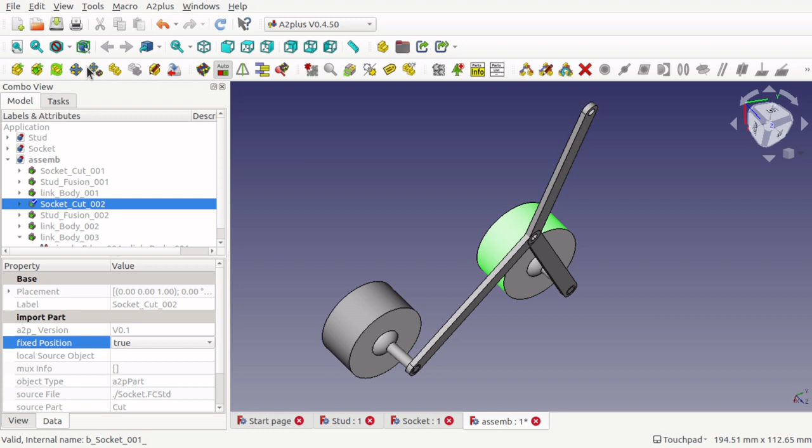If I come in here and drop this and select this one, which is fixed position of false at the moment, fix that one to true, and I can move this now, and you can see how that's moving as well. So you can see those ball joints working there.

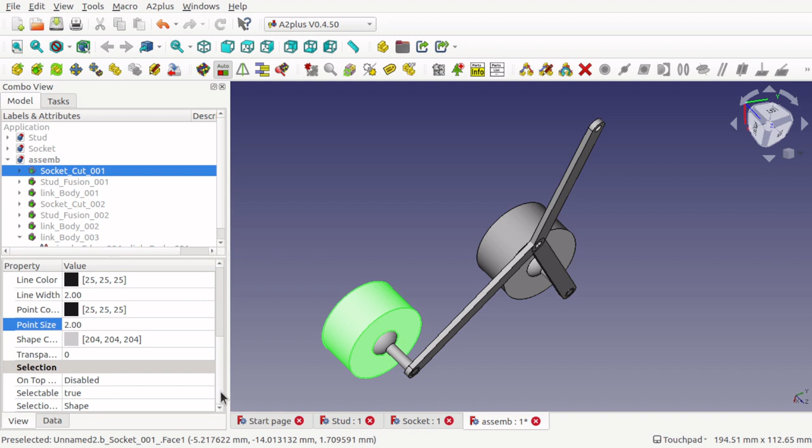As I said, this is very top level and there's not too much modeling that's gone into these. They're quite simplistic, and I can show you those if I click on that one and come into the view and come down to transparency. There we go, and just knock that transparency down. And you can see how that ball joint sits in that socket there.

So very simple. Again, as I said, we'll model these in a much more authentic way in another tutorial. But this is just to get you up and running with A2plus Workbench and how to create a ball joint assembly.

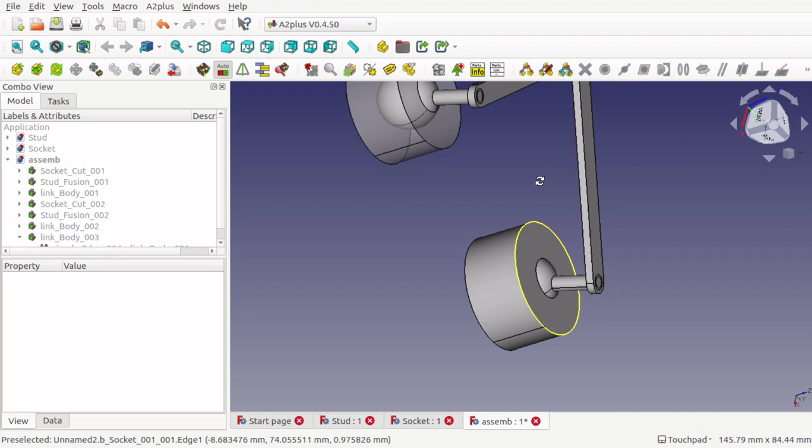So we're going to create a very simple ball joint for this demonstration, and this is just to get us up and running into the A2 workbench. And for this, if I bring up a ball joint, we've got the stud, the ball and the socket. Now I'm going to recreate this in very simple geometry.

So I'm going to create a cylinder here, a sphere here, and basically another cylinder for this to actually sit in. And this is just to get us up and running with the A2 workbench and how to get that simulated in there. We'll be going back to this and recreating this in much more detail, probably with the part design rather than the part workbench, and using a revolve to create this stud and modeling this properly within here.

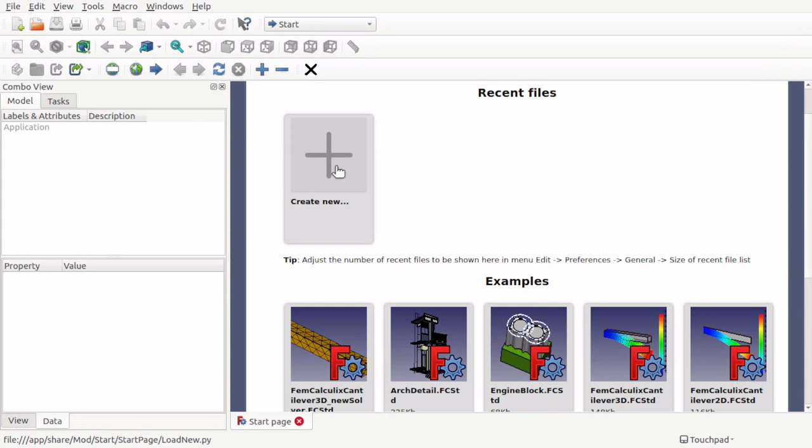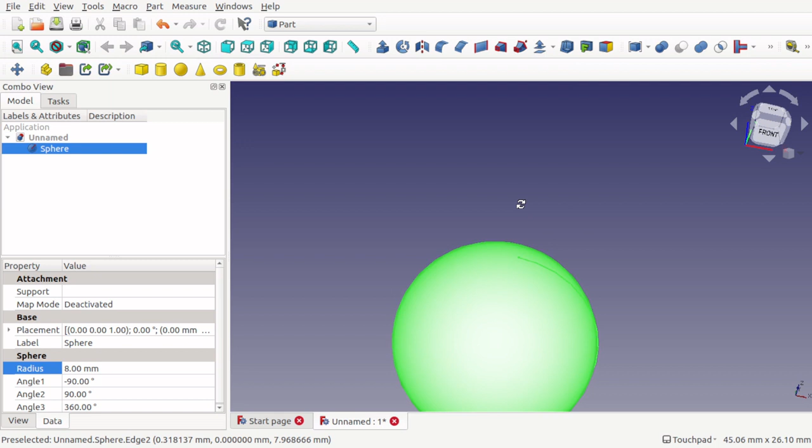So I'm going to go over to FreeCAD, create a new document. I'm going to jump into the part and we're going to create the stud first. So the stud is quite simple. We need a sphere and we'll give that some radius. There's 5mm at the moment, so we'll give it about 8. And also I want to place a cylinder on here. So I'm just going to place this in the front and move this into position, and I'm going to place a cylinder in there.

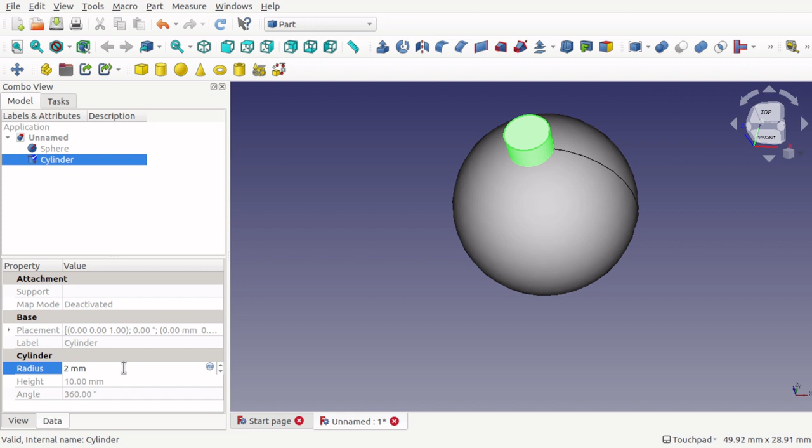So that's there, and we're going to give that some height. So this is the stud, and we're going to keep the 2mm radius and go for about 20 on the height. So there we go. So it's a very simple stud with a ball there, and we're going to use the sphere and hold down control and click on the cylinder. And we're going to combine those together with make a union of several shapes. So those are combined as a fusion there.

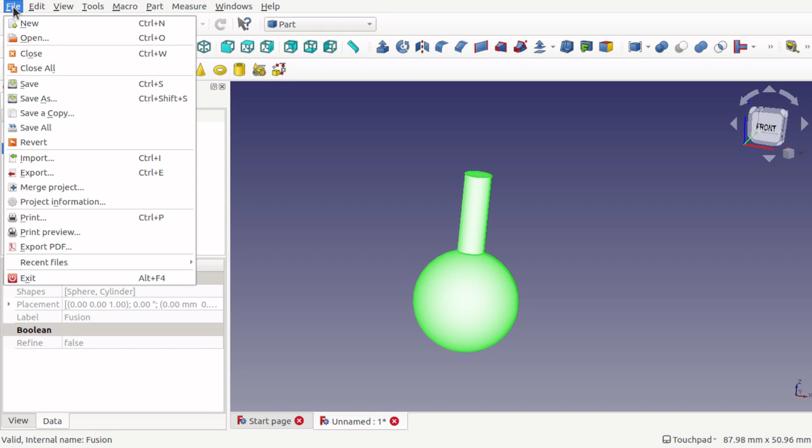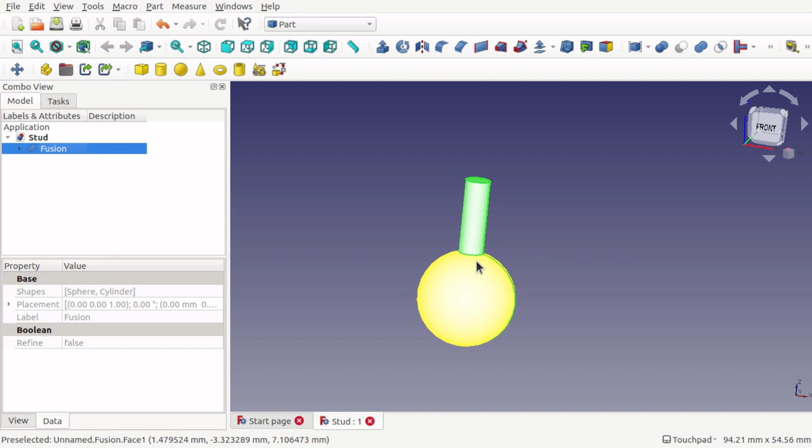Now with the A2 workbench, we import the models in there. So we need to save this off. So save as, and I'm going to create a new folder, and I'm going to call this ball joint. And in that folder, I'm going to save this as the stud. So that's that one done. So you can see what level of detail we're going to. We're going very top level here. So that's the fusion with the sphere and the cylinder for our stud.

And now I'm going to create a new document. And this is going to be for our socket. So I'm going to save this straight away. Save as, and I'll call this socket. And it's going to save in the same directory as the ball joint. And for that socket, we need a cylinder. Now if we remember back to our stud, we can actually come in here and look at our cylinder and sphere in here, which I need the radius from.

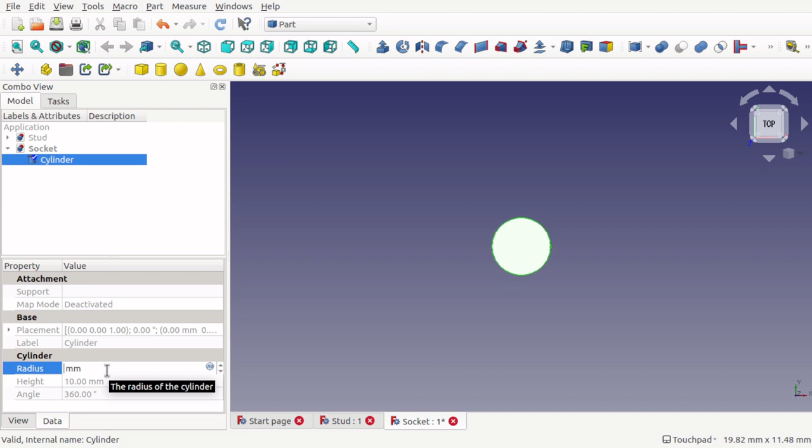So that's 8mm. So this is going to have a pocket in here that's going to contain a radius of 8mm or slightly more to house that ball in there. So we come back to our socket, and I'm going to make the radius of this around about 8 point... well, I need it more, so we can go for 15. And we need a height. I'll go for 15 on that one as well.

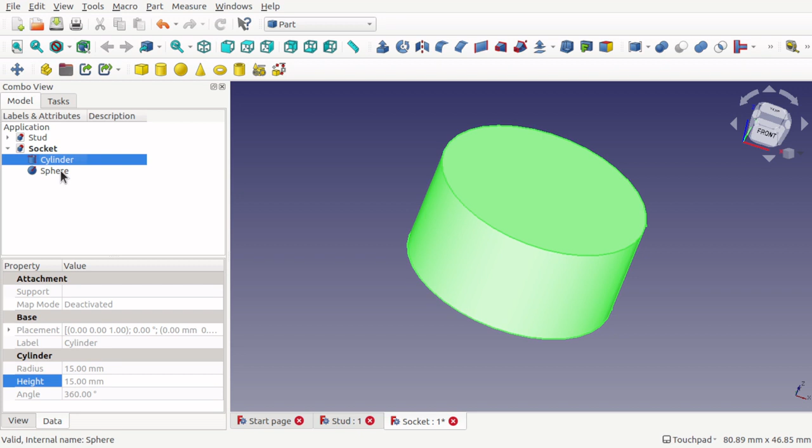So that's done. I'm going to create a sphere now. Now that sphere would have gone in the middle of that cylinder, which is fine. And that sphere is going to be the same size as the sphere here, so 8mm. And that will section out a piece inside here that will house that ball.

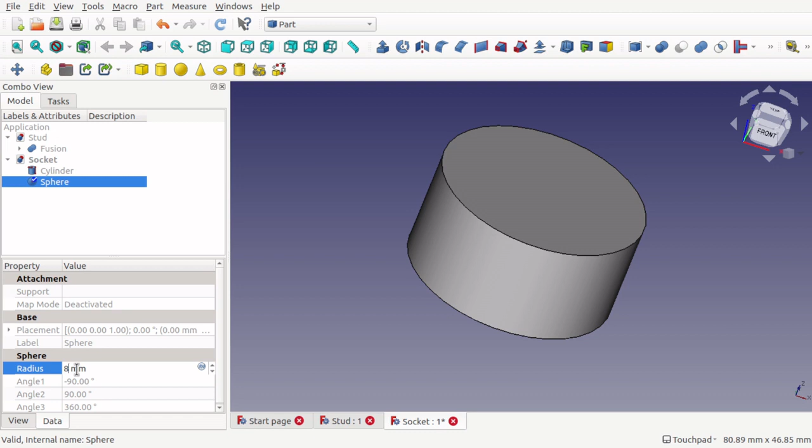So come in here, that sphere, 8mm on the sphere. Now I'm going to click on that cylinder. I want to see inside it so we can see what we're doing. Come down, look at transparency, and just set that to around about 50. You can see that sphere is inside there.

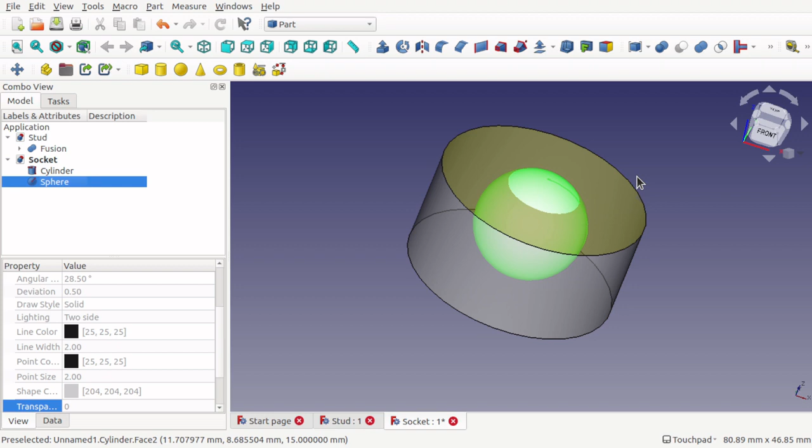Click on the sphere, right click, transform, and I'm going to bring this up so it just pops out the top. Something like that. So that's all we need. And I'm going to take the one that I want, which is the cylinder, and control click the sphere to highlight those two. So the one that I want is the cylinder at the moment, and I'm going to remove the sphere from inside that, and we're going to use the make a cut of two shapes.

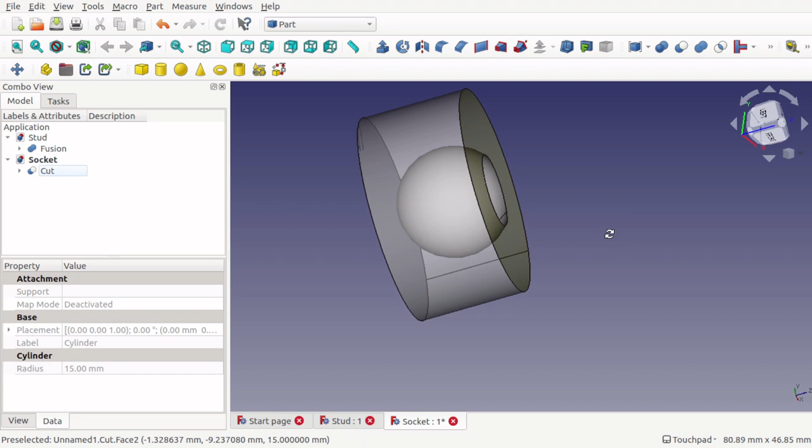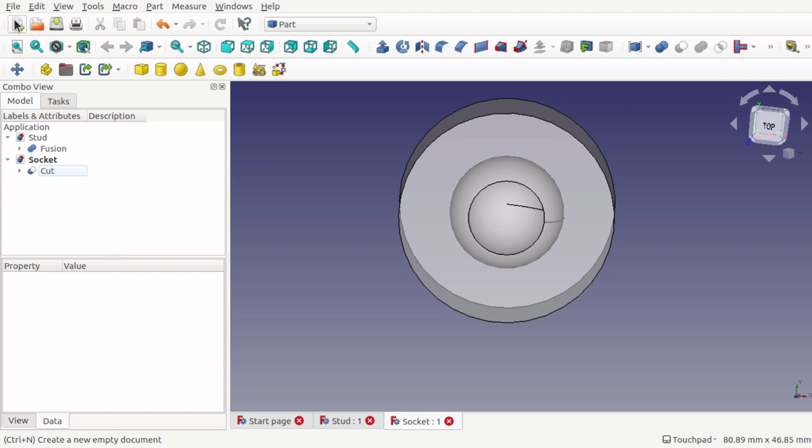And you can see that's been removed from inside there. We've got the cut there. So what we'll do now is place the ball in here when we come to our assembly and add restrictions within this to house that stud. So we can save this socket now, Control S or File Save, and now we're going to create an assembly. So for that we need a new document again, and jump up to the A2plus Workbench.

If you haven't got this installed, then you need to come over to the Tools Add-on Manager, and within there you'll find the A2plus Workbench. So there it is there. So just click on that and click Install. If it's a bit old, you can also update it if you so desire. And you may need a restart for that workbench to appear. Once you've got that workbench there, we can jump into that workbench.

We've started a new document, and we can import our models. So using the add a single shape out of external file to the assembly, or we can even use the add a part from external file. I'm going to use this one here. It'll first ask me to save it. So we need to save this document, and remember this is the assembly. So I'm going to save that as assemb. That'll do.

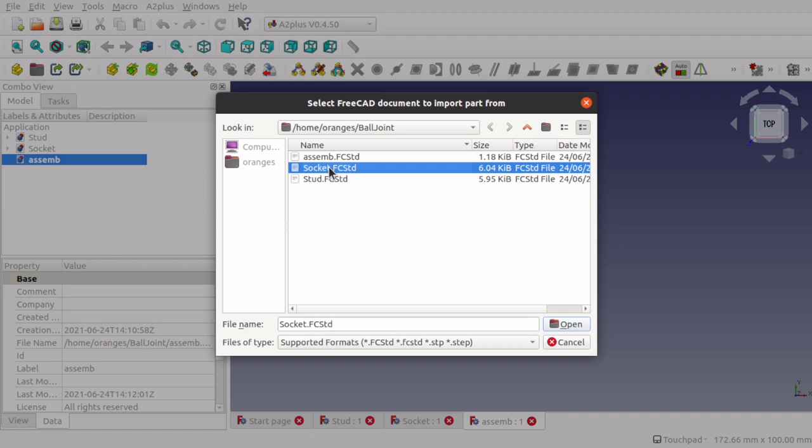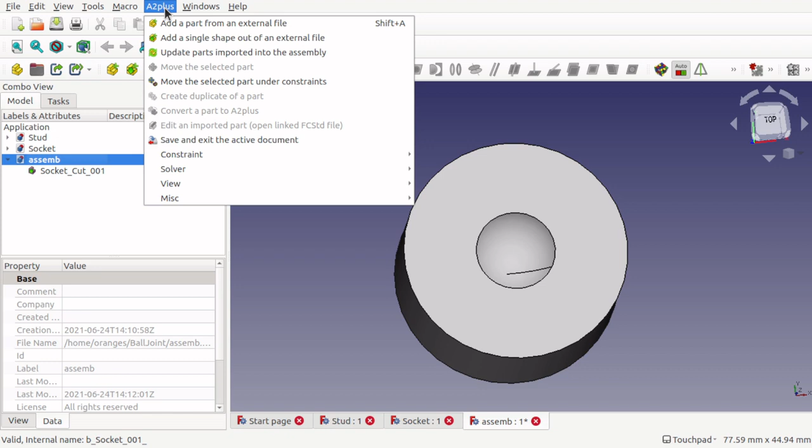And now we can import our model. So add a single shape, come down, and I want the socket. Open that up. There's one part in there called cut, so we'll choose that, and that's imported in. So that's sitting there. The next one we want is the stud. So we're going to do the same. Add a single shape, or up to the A2plus, and add single shape there, and click on the stud and open. And I'm going to choose the Fusion because it's the only one there. So now that's mobile on your mouse pointer.

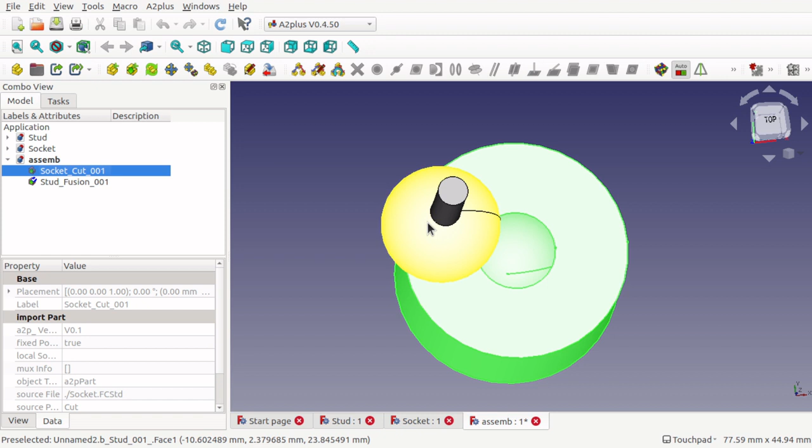Now, word of advice here, don't press any up and down arrow keys to move the screen, because you may switch the workbench, because the focus at the moment is still on here. So for instance, if I press down, you can see that the focus was on somewhere else. So it's on this assembly here, and it's actually selected this. If your focus was up here, it would actually change the workbench.

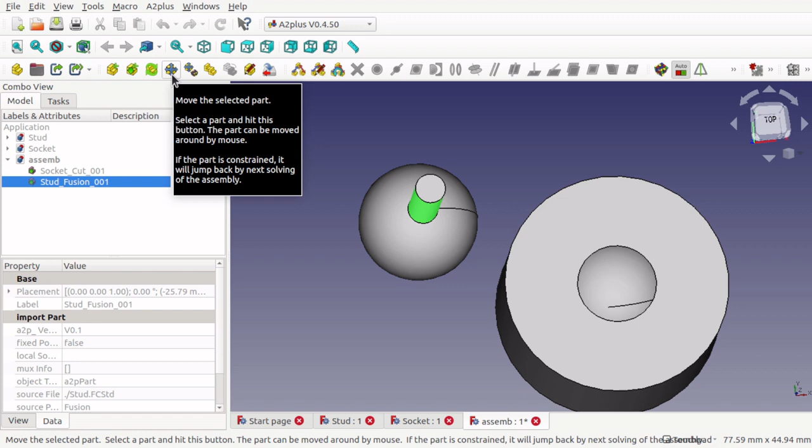So it's best to drop that and then move the screen, and then we can pick that back up by using the move the selected part and move that into place. Now we don't have to move it into the exact place, just move it near. So for instance, I'm going to just place it there, hit OK, and I'm going to select this ball and select the internal of this shape here.

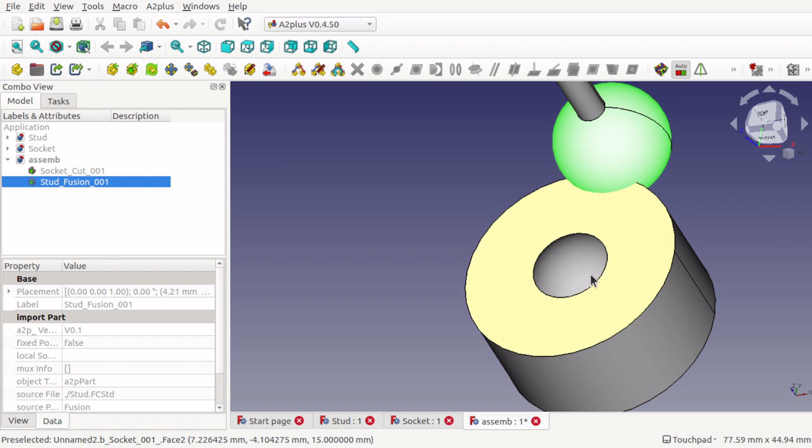Matter of fact, let's select this shape and see if we can give it some transparency so we can see what we're doing inside. There we go, so we can see inside there. So select this ball and then come in, look in the top, and we can select the inside there.

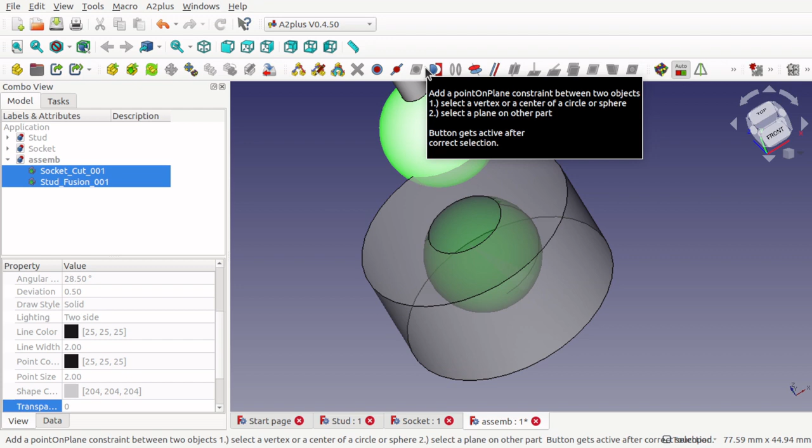Now we've got a number of constraints up here, and I'm going to use the add a sphere constraint here, this one here. We'll go to A2plus constraints, and add this sphere constraint here. That places it within that hole, and we'll set that. Now at the moment, if we're using the move the part under rule of constraints and click in there, you can see nothing's happening at the moment.

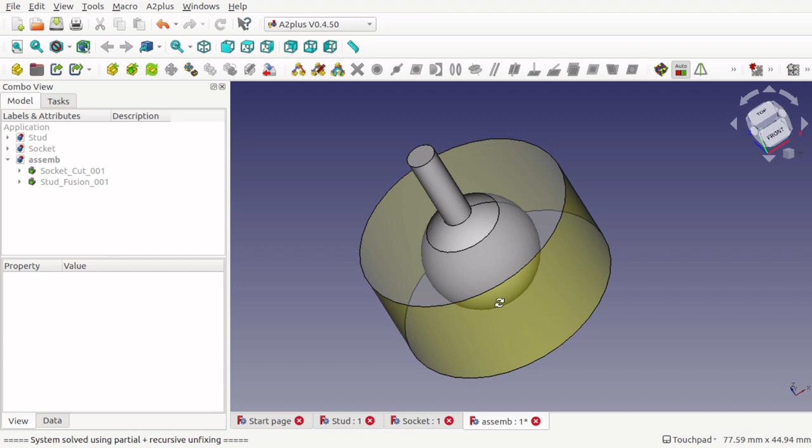Now the reason being is one of these parts needs to be made static. So we're going to have this part here as the part that doesn't move. So we'll click on that part. This may already be static, so we'll look down. And that's got a fixed position of true, which is correct. That's fine. And this one has a fixed position as false.

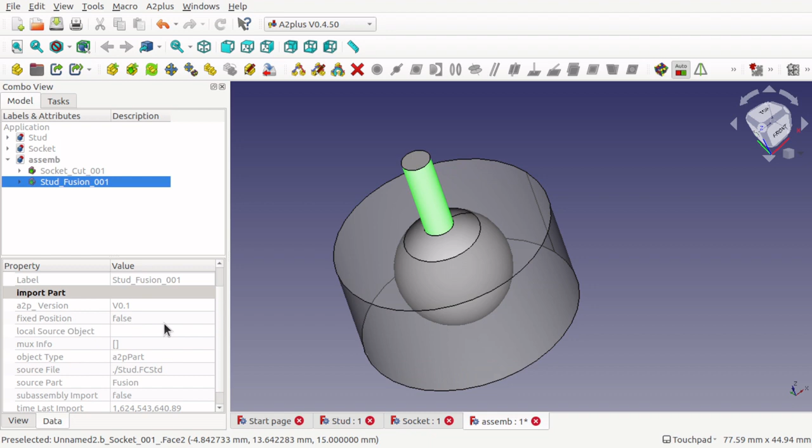Now what we need is something else to attach to this, because as you can see, if we try to move this, nothing is happening. Normally if you have a secondary constraint or a secondary item in here, then this will start to move. Now I have made a link arm to attach to here. I can import that in, and I'll show you how to model that in a minute, and I'll show you what happens when I import that in.

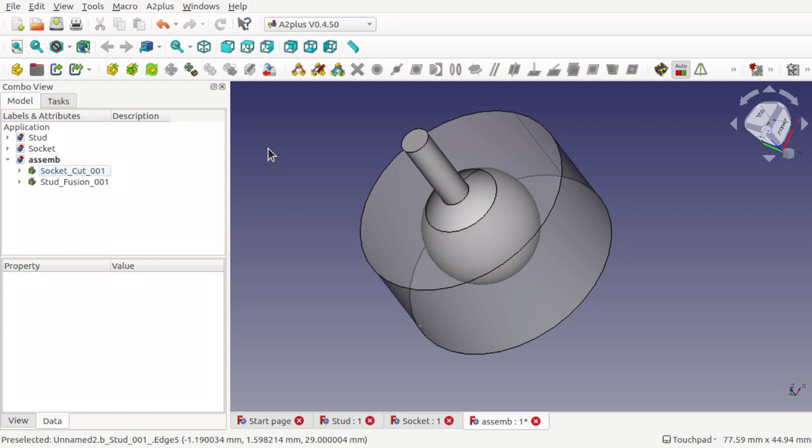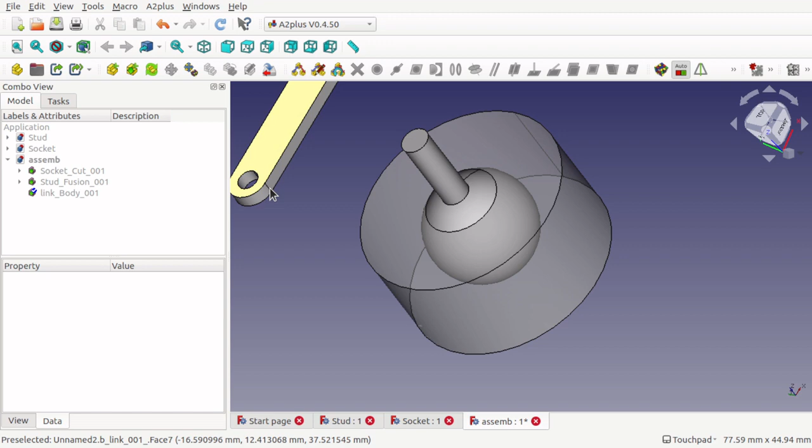So we'll import, and I think my link arm is in my test folder. Let's have a look. Yeah, testing and link, and this is just a basic arm, so we choose that one. I'll show you how to make this. It's very simple to make. It's whatever you want to connect to this, and this is just for testing purpose, remember.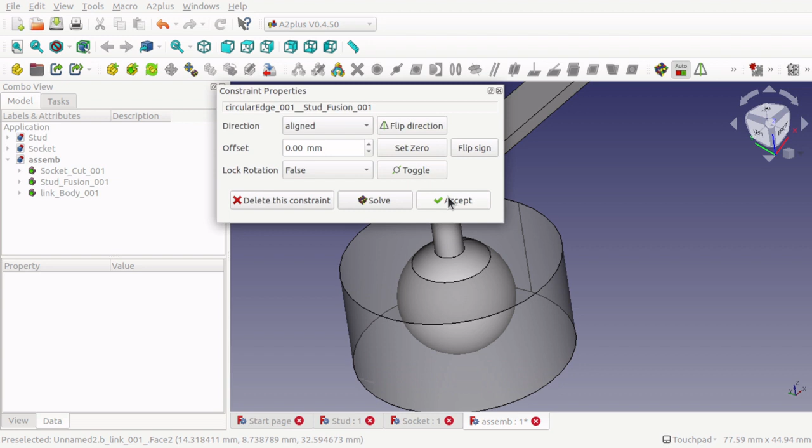And I'm going to select this circle here and control select this circle here. I'm going to use the add a circular edge constraint, and that will place it on top of that and then set that. Now when I move this, you see this ball joint move. So we use the move the part under rule constraint, select that, and we can see that's now moving.

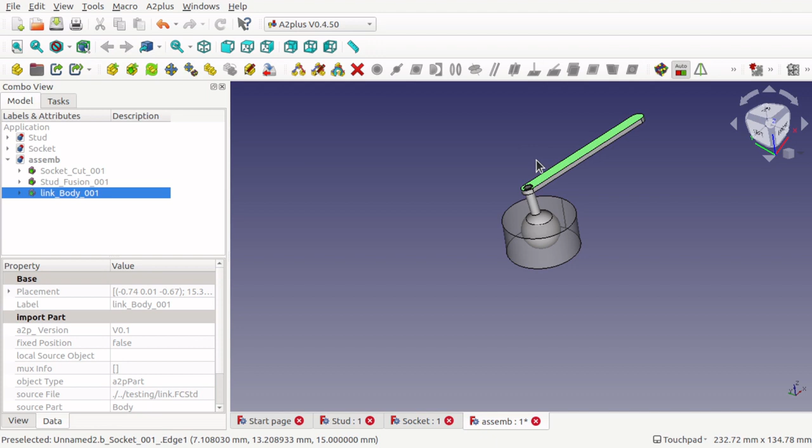The only thing you have to be careful of is that you can go outside of that circle there. I've tried a number of constraints to try to stop that. I haven't found any constraint as of yet, so you just have to be careful when you're creating your model. If anybody can come up with a type of constraint on here, I've tried a number of them. Try sectioning this ball a number of times, place angle constraints on there, and that doesn't really help either.

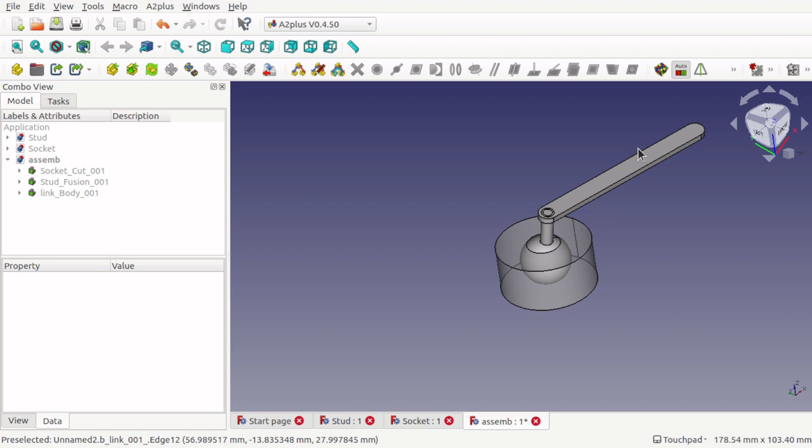But if someone can find some kind of constraint or way of constraining this, that would be great. I've tried for about an hour to figure out how to stop it from exiting this circle here. But I think you just have to be careful when you're doing your animations and simulations to make sure that it's all connected up properly and constrained somewhere else, so you've got a degree of constraint on that to stop it from moving outside.

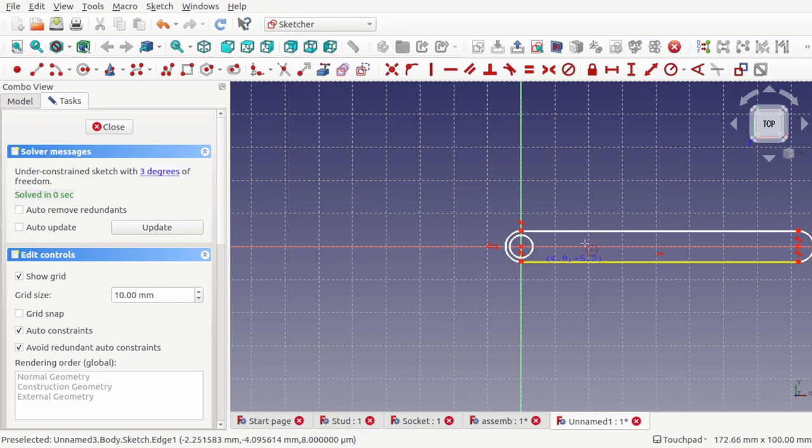This link, which I created, was really simple to create. So if I go into the part design, I'm going to create a new document in there and create a new body, create a sketch, XY plane, and it literally was a slot, and just constrain that to the center like so, and a circle in here, the same size or around about the same size of the connection point, and it was literally a close and a pad to around about 5mm or so.

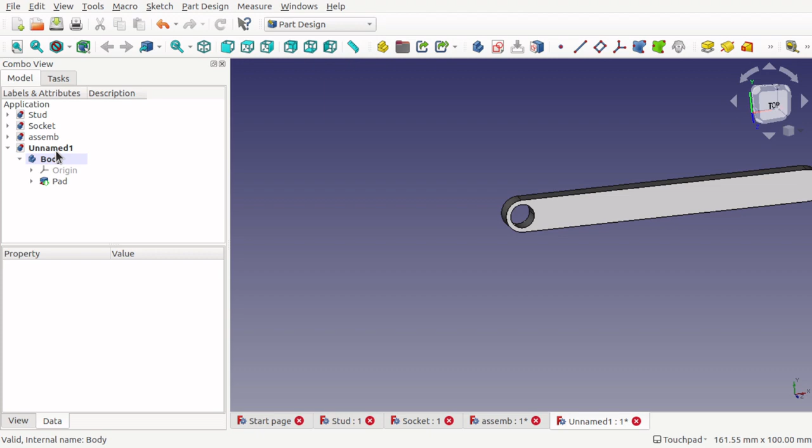And that's all that is. And we can save that off and import it in. So that's all that link was. Just needed something to attach to it for the demonstration. So I'm going to close that document because I don't need it because I've already got a link in there. We'll just save that assembly.

What I'm going to do now is create a secondary bearing in here, add it to the assembly, and I'm going to show you something that you may come across when you're trying to figure out how to connect them together, and some of the errors that you'll encounter and how to solve them. So I want to create another bearing in here. So I'm going to import the same files.

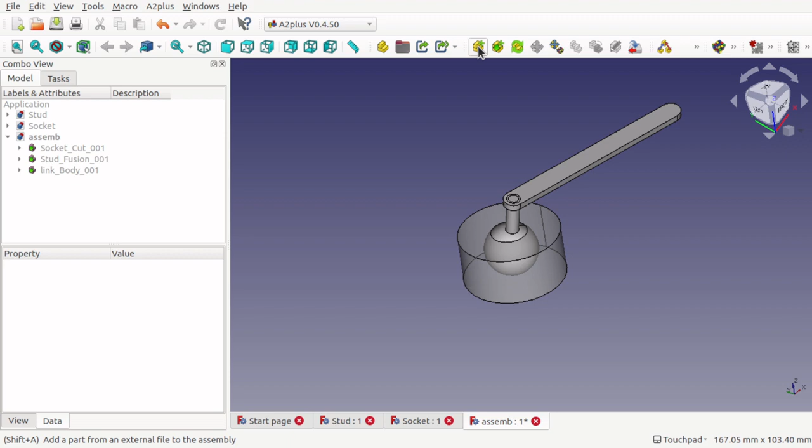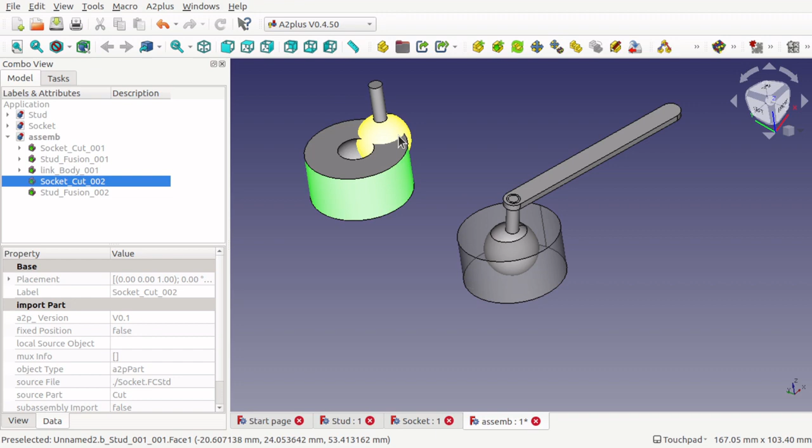So we can go in and go to the ball joint, and I want to insert the socket. Choose that. And I want to insert the stud. Choose that. We'll just place it there. And we want another linkage. I really should move that linkage to the ball joint directory. So let's find the linkage.

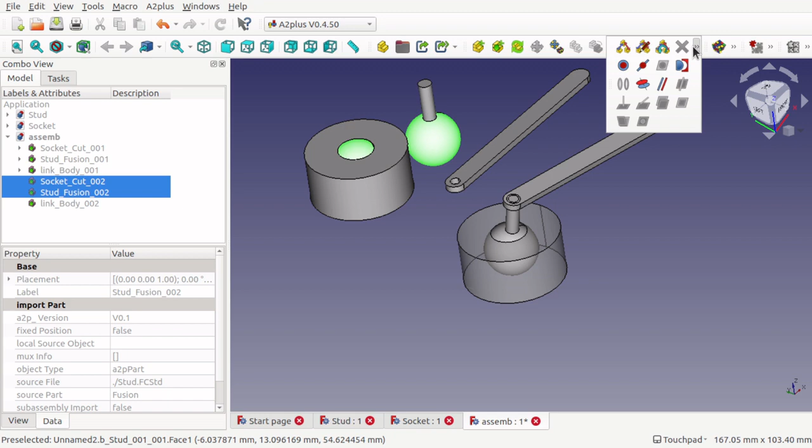So that's the linkage in there. Now you're going to come across a problem here because we need to understand how this works. With the A2plus Workbench, everything's one continuous flow. So if I try to start doing the same constraints against this bearing as I did before, then you'll get errors. For example, if I constrained these two together, like so, and use the same spherical constraint in there, you'll see that I've got an error there. And that's because there's not one continuous flow against this.

So if I just delete that constraint, hit yes. If this was in here, along with this linkage, which it will be in the end, then we've got two lots of constraints to calculate across here, basically two models. The way to do it is actually build your first bearing, attach it to something, and then that part then attaches to another bearing. We can get these in place and place them on our assembly, but they all have to be attached together in a chain for the simulation to work.

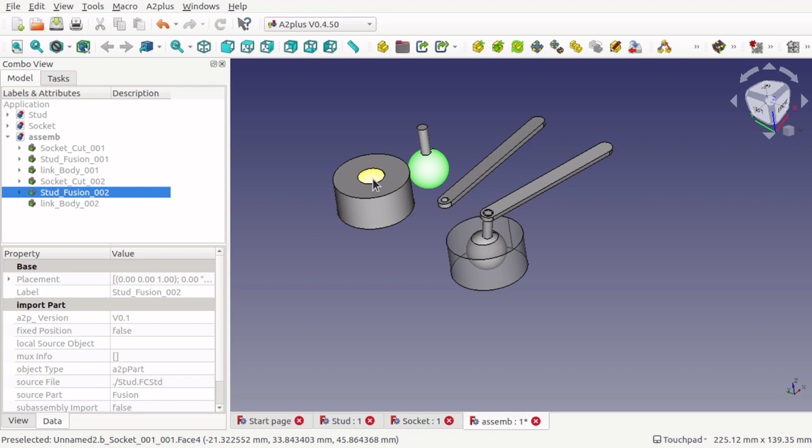So for instance, if I placed another hole here and attach this hole to this stud, then I can attach the end hole to the other stud and then the ball to the bearing socket. In that way it will all work. So we'll just do that. So first thing we need to do is go into our linkage and edit that. So I'm going to open that up and find it.

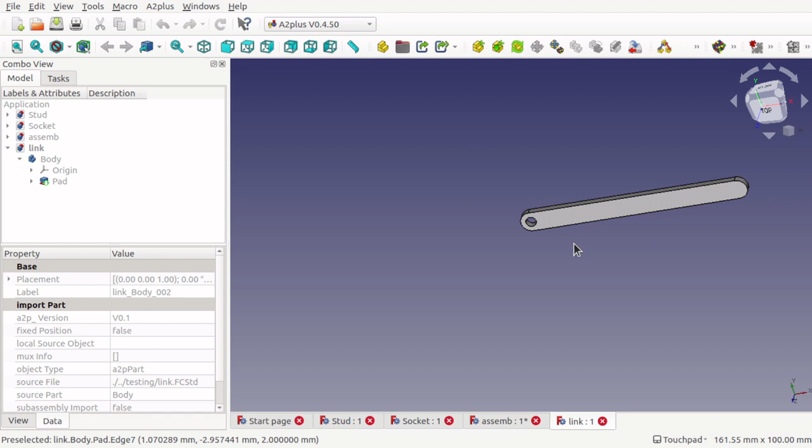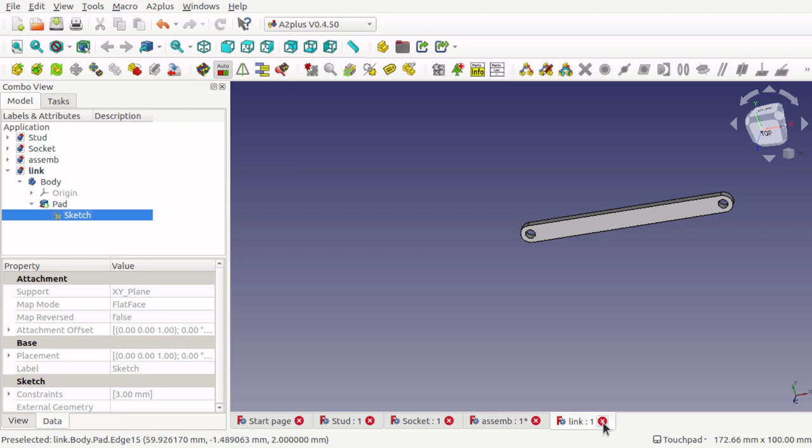And all I'm going to do is come into the pad, double click on the sketch, and I'm going to take this circle, hit Control C, and just bring it over and connect it up to there. Hit close. So there's two circles on the end of those, two holes. Control S to save that. And we can get rid of that linkage now. I'm just going to save the assembly. And what I'm going to do is just refresh these parts. So if we look along the top toolbar, we can see this refresh button there. Let's just refresh those parts.

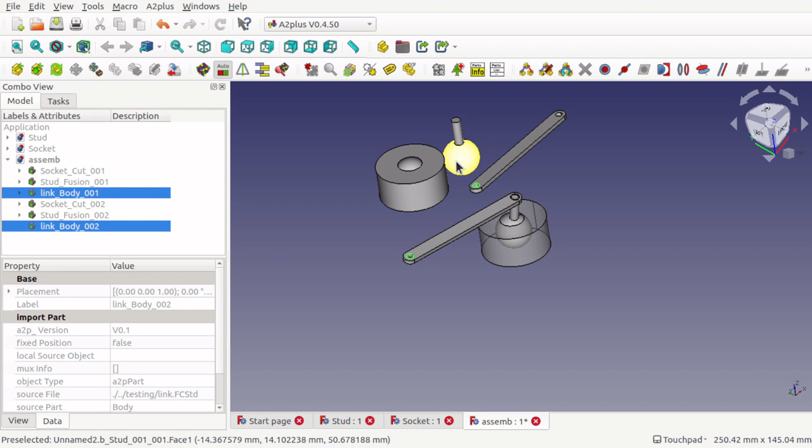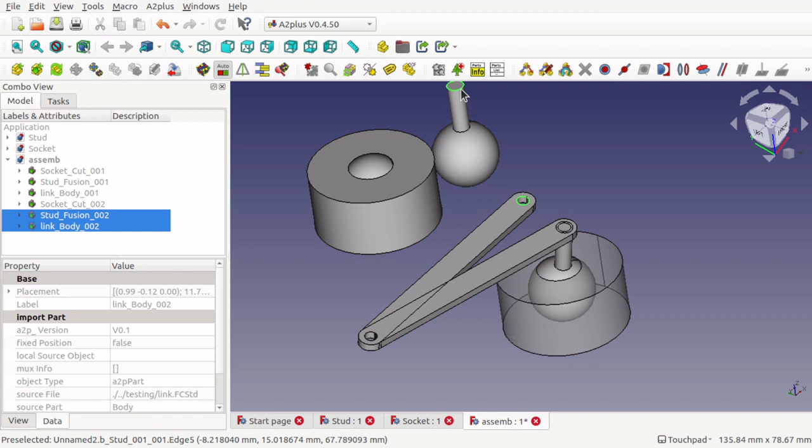Now I'm going to take this circle and this circle, hitting Control and selecting those two circles, like so. And we're going to use the circle and circle constraint, and you can see that's constrained now because this one is under our constraint chain and they act as one. So I'm going to set that, and now I'm going to attach the top circle to this top circle here, circle edge constraint, set that.

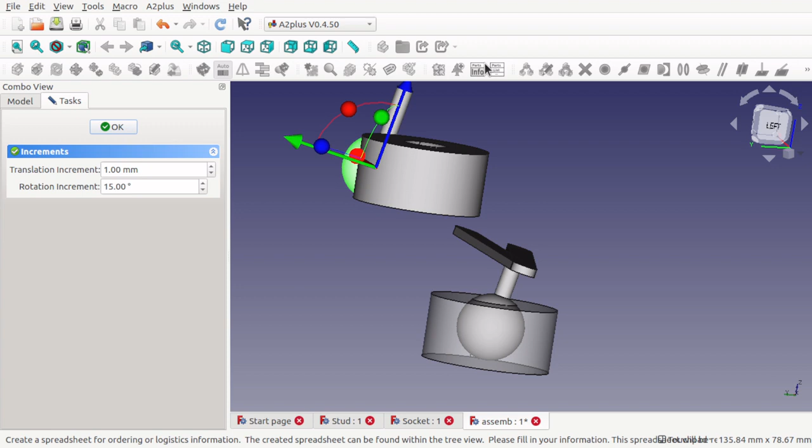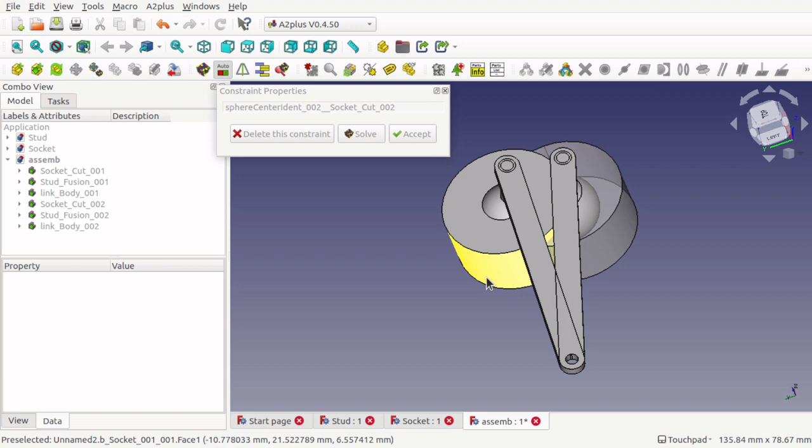Now I can move this, so let's just find it. There it is. So click on that sphere and we'll just move that. I can just move it out and up. Hit OK. And I'm going to click on this sphere here and the inside, control click, and use the sphere constraint in there. So let's move that down into constraint now. So those two bearings are there. Set that. Now this one should be fixed position is false, so that's movable.

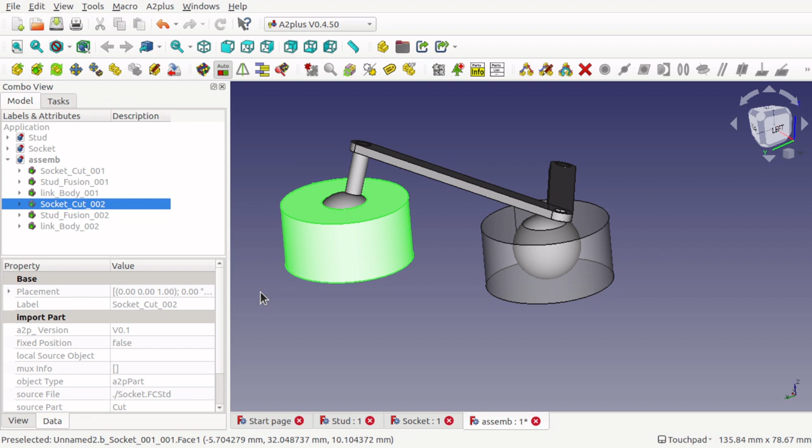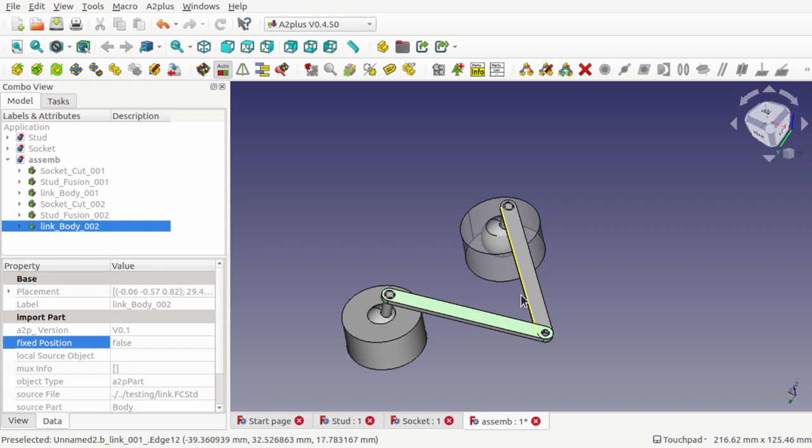So we can move that by using the move the part tool there, and just click on it and move it. Place it here, and what I want to do is fix that position. So fix that as true. So now these are constrained together. So we click the move tool, click on here, and we can move these across those ball joints. So that's working nicely. If one of these won't move, it's fixed. So let's make that false. And then we can move that in. So you can see how that's working as well.

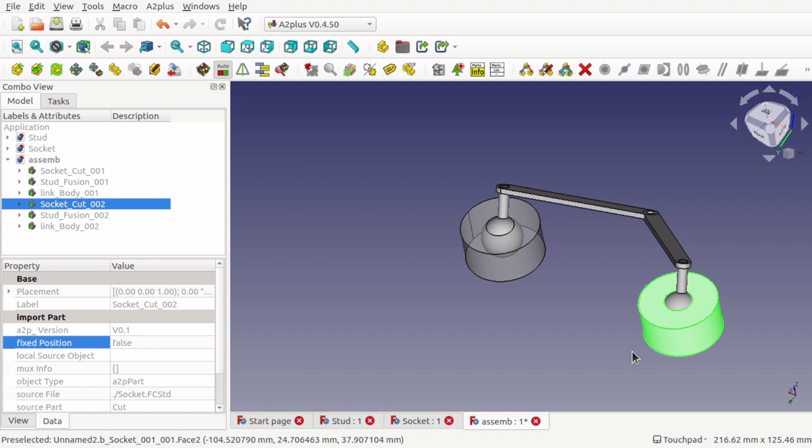If you're wondering how this move tool works, just hover over it. It tells you there. So one, hit the button, click the part, and then move your mouse pointer. You don't drag and click, you just click and move. So click on the move tool, click on the part, and I haven't got my mouse button pushed down at the moment, and I'm just moving that into position.

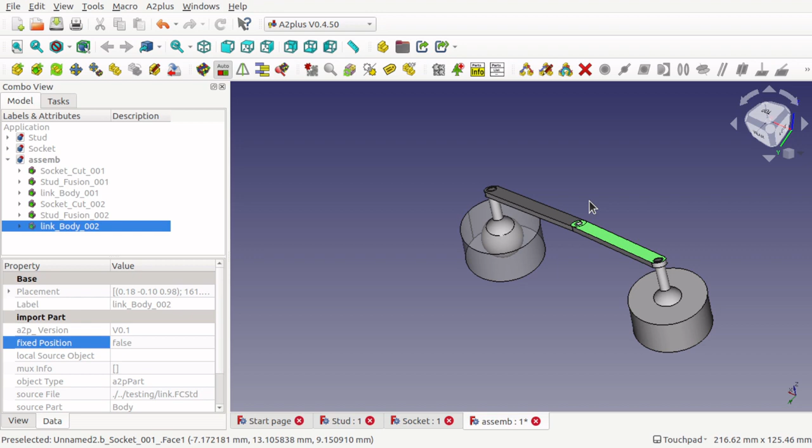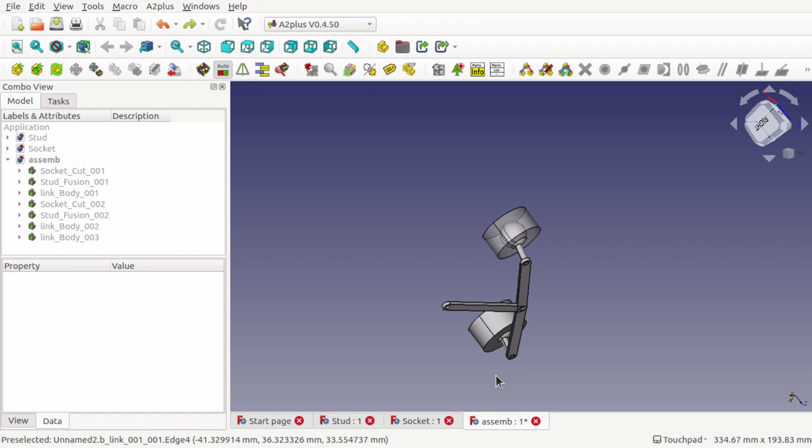Okay, so that's a very simple ball joint. Hope that's helped. And what we'll do is in another tutorial, we'll look at these ball joints and create something in the part design that more resembles a ball joint and add it to our A2plus workbench and get it animated in there.